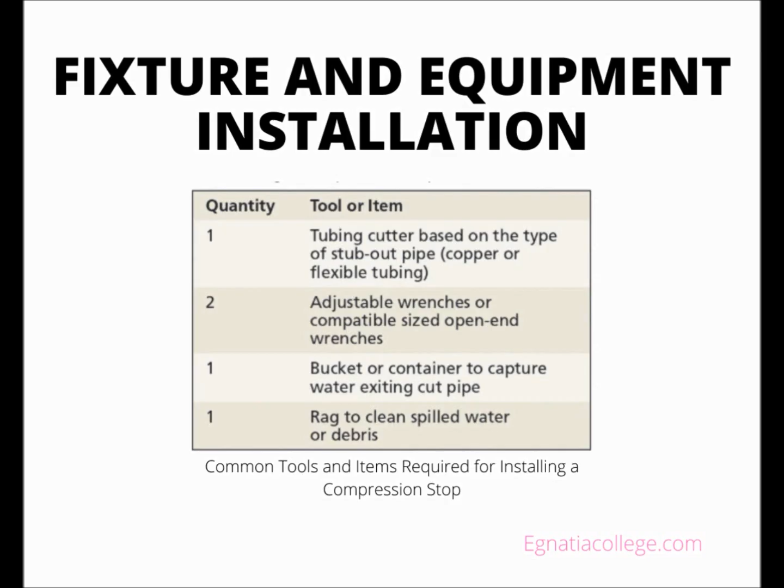All sinks and toilets have an isolation valve called a stop. A wall or floor escutcheon is installed before the stop to conceal the hole opening of the pipe through the wall or floor. An ice maker and washing machine box require only the trim plate to be installed. A plumber installs a dishwasher while installing the kitchen sink.

Escutcheons and stops. Every ceiling, wall, or floor stub-out must have an escutcheon installed to conceal the pipe penetration. The pipe penetration through a fire-rated ceiling, wall, or floor creates a small opening that must be sealed with an approved fire caulk before the escutcheon is installed. Some codes also dictate that a pipe penetrating a non-fire-rated ceiling, floor, or wall must also be sealed to prevent insects from entering a home through the pipe penetration.

Escutcheons are available in plastic or metal forms, and exposed escutcheons are color-coordinated with the faucet or other trim items. A split escutcheon can be installed around a pipe after the stop is installed, but it is not visually attractive. Escutcheons are ordered for the pipe being served in either tubular or iron pipe size. Every fixture except a bathtub and a shower faucet must have an isolation valve or a stop.

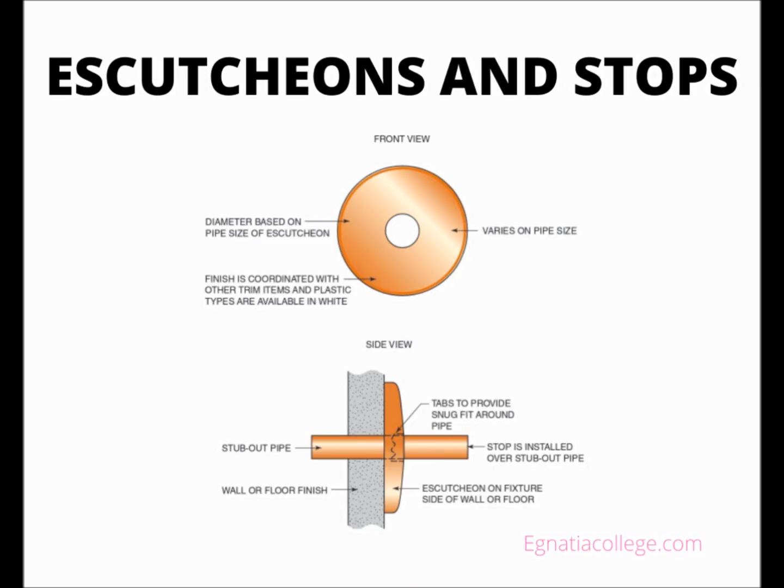The boiler drains that are installed in the washing machine box during the rough-in phase serve to isolate a washing machine. The wall trim plate conceals the wall opening. An ice maker box is similar to a washing machine box, and the isolation valve is also part of the rough-in installation. Sink stops are installed below the fixture and connected to the stub-out pipe. They do not have to be color-coordinated with the faucet finish if they are located in a cabinet.

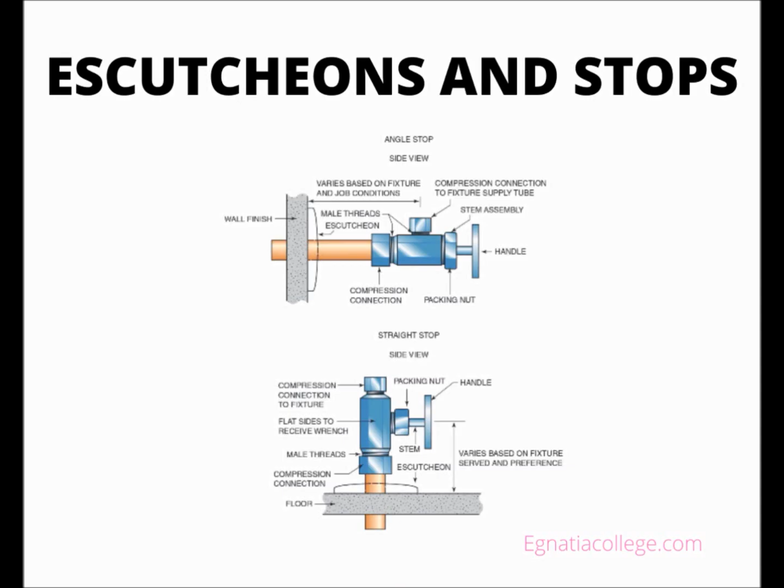A toilet stop is installed onto the stub-out pipe and is coordinated with the trim finish of the faucets in the bathroom. A separate stop might isolate a dishwasher under the kitchen sink, or a dual stop might isolate the dishwasher and hot water supply to the kitchen sink faucet. The type of pipe used as a stub-out determines the connection of a stop to the stub-out pipe. A PEX stub-out pipe requires a stop compatible with that pipe. The connection method is the same as the one used to install the PEX piping during the rough-in.

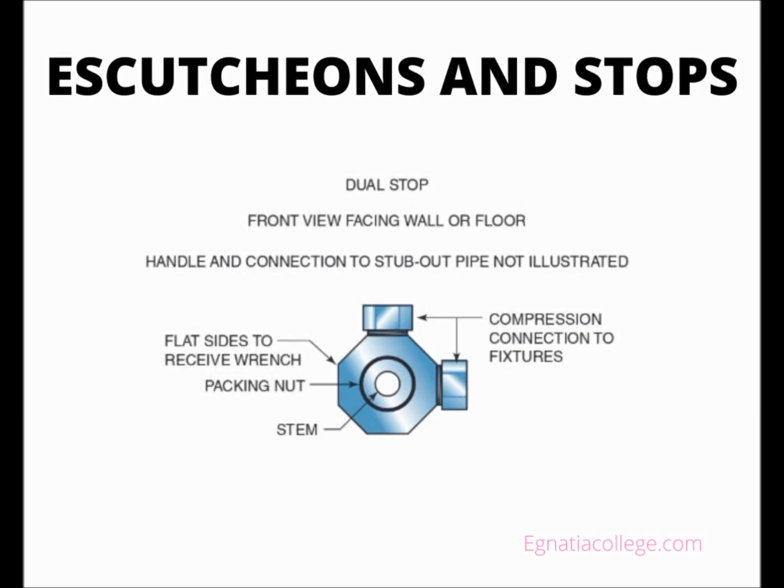A copper stub-out pipe is connected to a stop with either a compression connection or a solder joint. A stub-out pipe that penetrates through the floor typically requires a straight stop. A wall stub-out pipe usually uses an angle stop. The outlet side of a stop is a compression connection regardless of the stub-out pipe installed.

Toilets. The water supply is located on the left side of all toilets, with the stop and escutcheon installed the same as for other fixtures. The stop and escutcheon can be installed before the toilet or, to provide a more exact installation, the toilet can be installed first. Because the water supply connection to the tank for a one-piece toilet is typically closer to the floor, the stop must be positioned more exactly for it than for a two-piece toilet.

A two-piece toilet is sold with a compatible tank and bowl, and a plumber must combine these two items. Some plumbers install the bowl to the drainage system before installing the tank, others assemble the set before installing the toilet. The tank is secured to the bowl with non-corrosive bolts designed specifically for this purpose and provided with the tank.

Most tanks use a 2-bolt pattern, some have 3 bolts. A rubber gasket is provided with each tank bolt to seal the bolt penetration through the bottom of the tank.

Most toilet tank designs require a plumber to install a foam rubber gasket, provided with the tank, that prevents the water that is leaving the tank and entering the bowl from leaking. The gasket, called a close-couple gasket or tank-to-bowl gasket, is installed over the threaded portion of the flush valve on the bottom side of the tank.

Some manufacturers install a rubber gasket that serves as the seal between the tank and the bowl. In this case, the plumber does not have to install a separate close-couple gasket. The plumber should review the manufacturer information provided with each toilet for specific instructions about the fixture being installed.

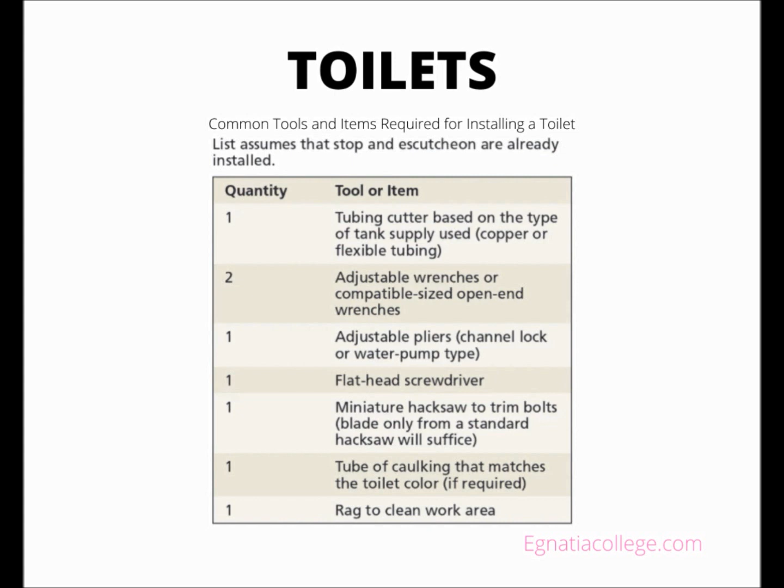The water connection to a toilet requires a supply tube, known as a tank supply, that is designed to mate with the fill valve. A tank supply is an exposed chrome-plated, soft copper tubing with a flat end that connects the stop to the fill valve with a compatible securing nut provided with the tank. Flexible plastic and braided stainless steel versions of a tank supply are available, each with a distinct connecting end that is beveled instead of flat.

The soft copper tank supply is bent by hand or with a bending tool to create the required offset to connect it to the fill valve and stop. The trade name for the fill valve is ball cock. It regulates the water level in the toilet tank.

The toilet is installed onto the closet (toilet) flange and sealed with a manufactured wax ring often called a wax seal. The wax seal is either installed to the underside of the toilet or installed directly on the closet flange. Most manufacturer instructions recommend installing the wax seal onto the toilet, but many plumbers place the wax ring onto the flange and set the toilet over it.

A plastic accessory called a horn is molded into some wax seals, but wax seals without the horn are more common and do not restrict the flow from the toilet. A closet flange allows two different anchoring selections to secure the toilet to the closet flange. One option has a large slot that allows a plumber to adjust the closet bolts slightly in case the flange is not installed to exact dimensions from the back wall.

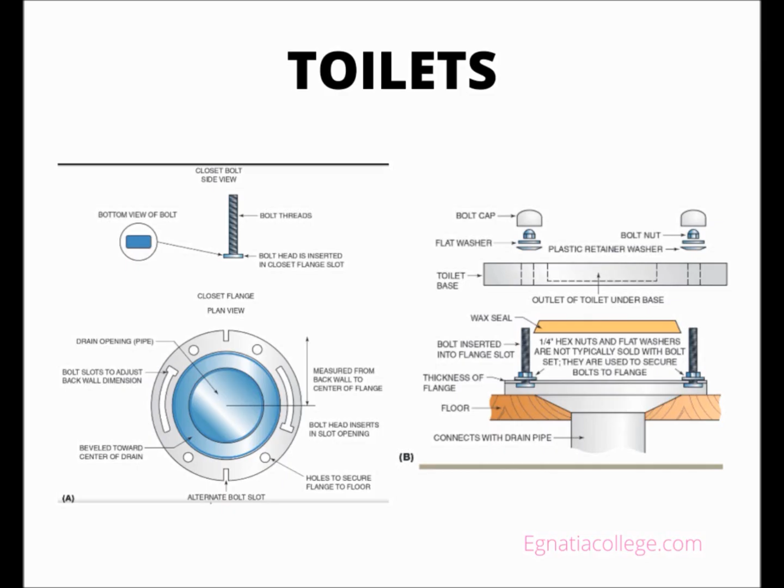In the second option, small slots require the plumber to install the closet flange to an exact dimension from the back wall. Most plumbers use the larger slot option. Once the flange is installed to the drain pipe, the next step is to install the closet bolts. A pair of 1/4-inch closet bolts is sold as a set along with the required flat washers and hex nuts to anchor the toilet to the closet flange.

Plastic decorative bolt caps and retainer washers that conceal the nut and washer of the closet bolt set are sold with the toilet. Each closet bolt is cut with a miniature hacksaw after the nuts are securely fastened to allow the bolt caps to be installed. A toilet seat is purchased by color and bowl design, either round or elongated. Residential toilet seats have a hinged lid and installation is self-explanatory.

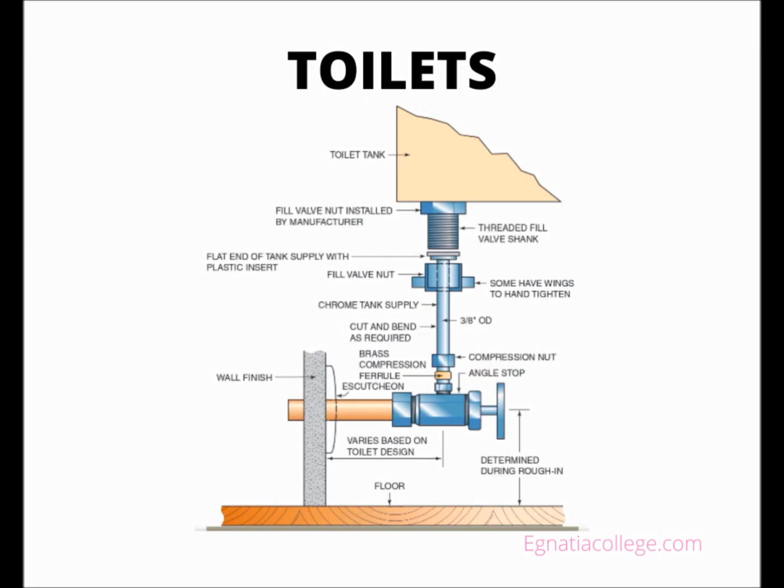Some codes require the base of a toilet to be caulked where it sits on the finished floor. If so, the caulk should be the same color as the toilet. This figure illustrates the connection of the stop and fill valve using a soft copper tank supply tube.

Lavatories. Most residential lavatory sinks are pre-molded with the countertop from cultured marble. A general contractor typically provides and installs the combined countertop and sink, and a plumber installs the faucet and drain to create a functioning plumbing system.

Numerous faucet designs are available, each of which is installed according to manufacturer instructions. A plumber must review the manufacturer information when installing a specific faucet for the first time to ensure that the installation is correct. Some faucets use a specific supply tube known as a lavatory supply. Other faucets use a compression coupling union connection.

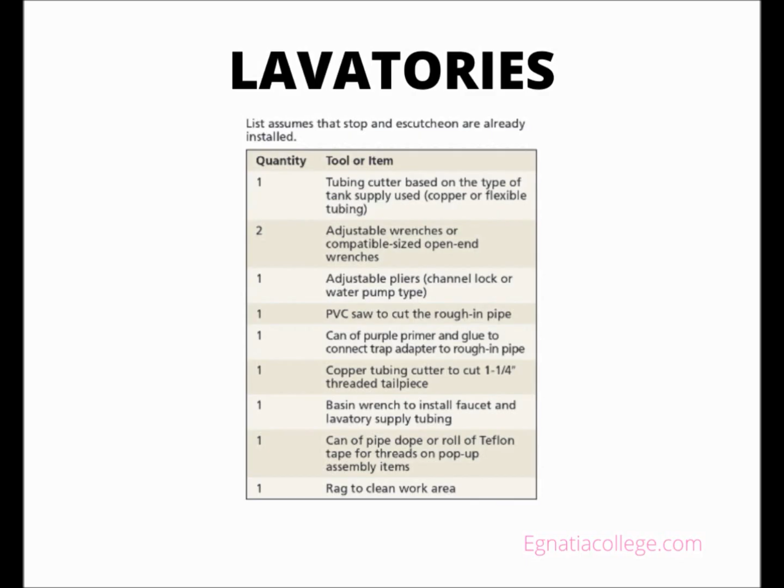Every fixture is protected by a P-trap to prevent sewer gas from entering an occupied space. The size of the stub piping serving a lavatory is either 1 1/4 inches or 1 1/2 inches.

A plumber typically installs a 1 1/4 inches P-trap. Therefore, a 1 1/2 inches by 1 1/4 inches trap adapter is sold with many P-trap assemblies. If a 1 1/2 inches P-trap is installed, it will have a 1 1/2 inches trap adapter. A reducing slip joint washer is required to connect the P-trap to the 1 1/4 inches drain from the sink.

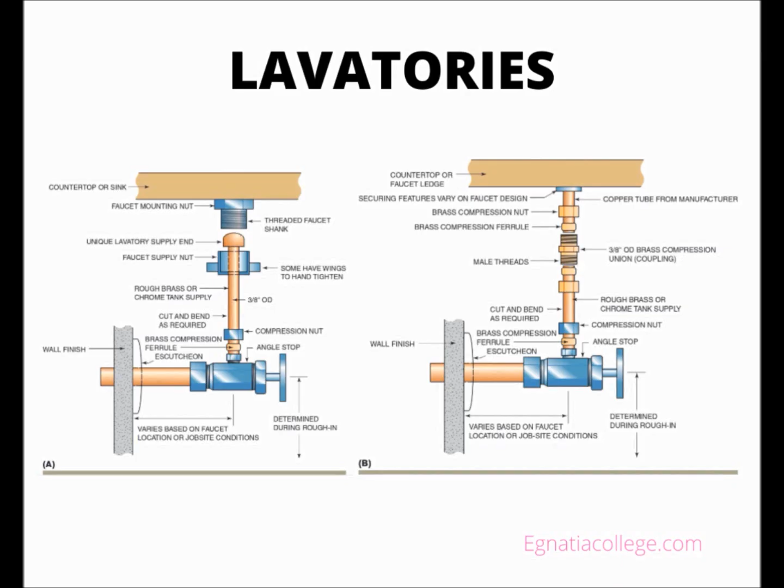Most residential lavatories use a pop-up drain assembly, which is sold with the faucet. The manufacturer installation instructions include specific information about the drain assembly. The overflow drain on a residential lavatory is provided by the sink manufacturer.

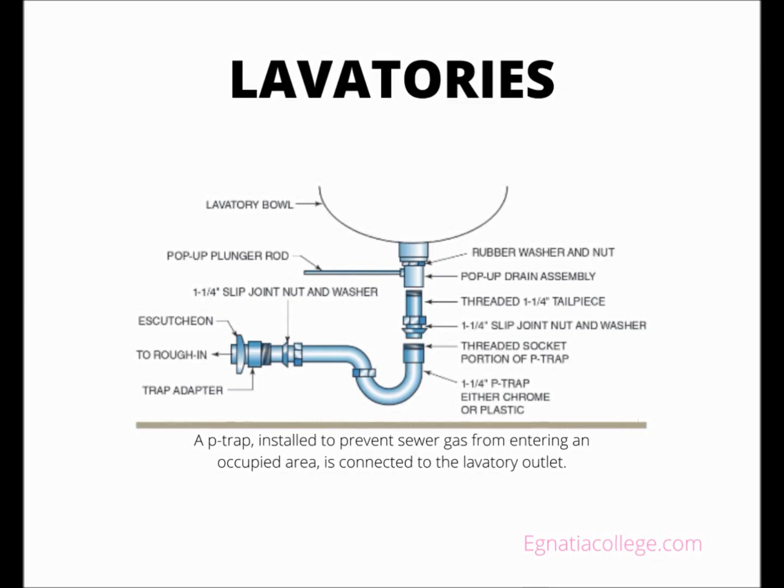If the tailpiece provided with the pop-up assembly is too short to be connected with the trap inlet, a longer threaded 1 1/4 tailpiece or extension tailpiece is installed. If it is made of metal, it is cut to the desired length with a copper tubing cutter. Plastic tailpieces are cut with the appropriate PVC saw.

Kitchen sinks. The tools required to install a kitchen sink are the same as for a lavatory sink, with the possible addition of a larger pair of pliers and a Phillips screwdriver. Numerous styles of kitchen sinks are available, and many have unique installation methods. Most kitchen sinks are installed into a cut opening of a countertop and on the countertop. Some plumbers cut the hole into the countertop. Usually the general contractor provides the opening based on the dimensions provided by a plumber.

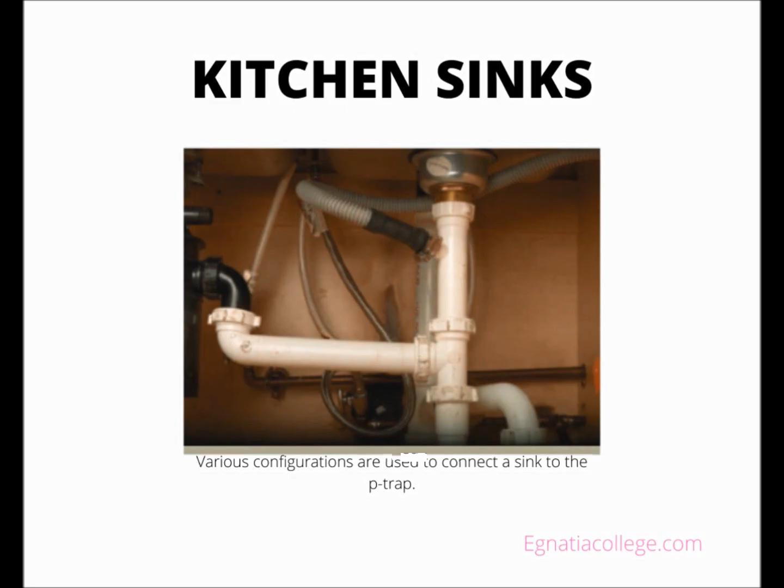Kitchen sinks in residential construction are often made of stainless steel or cast iron. The weight of a cast iron sink provides the stability needed to maintain its permanent position on the countertop. A plumber typically applies caulking to the edge of the cutout area of the countertop as the cast iron sink goes into the hole. The excess caulking is cleaned with a wet rag.

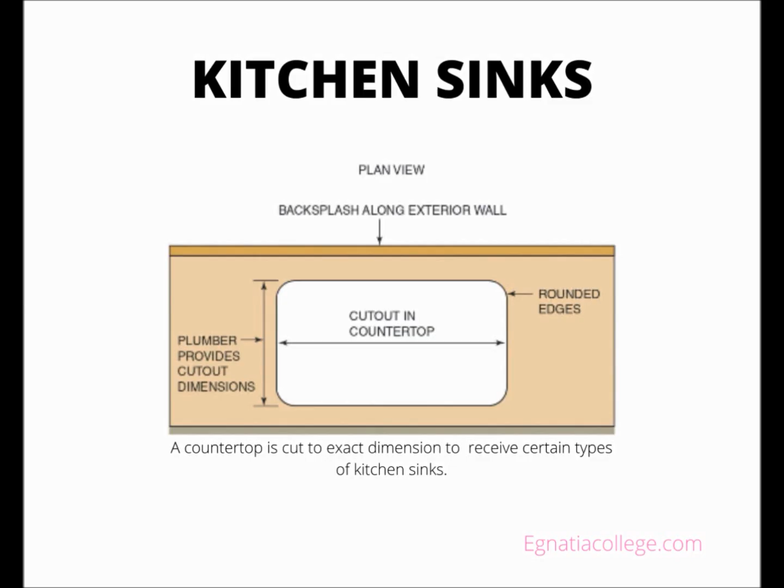A stainless steel sink must be fastened with clips provided with the sink. Putty or caulk is applied under the rim of the sink or around the cutout area of the sink. The sink is then inserted into the cutout and attached from under the countertop with the fastening clips. The faucet is typically installed onto the sink before the sink is installed onto the countertop to increase productivity.

Basket strainers can be installed in the drain openings of a stainless steel sink before the sink is installed. Basket strainers are installed after a cast iron sink is installed because drain openings are required to safely install a heavy sink. The drain connection arrangement below the sink varies based on the location of the stubout, the number of bowls, whether a garbage disposer or a dishwasher is installed, and company preference.

Code allows a single P-trap to connect a double bowl sink, and a plumber typically uses an arrangement known as a continuous waste, which is purchased as a kit. If a garbage disposer is installed in one side of a double bowl sink, a plumber typically installs a separate P-trap for each drain opening.

If a dishwasher is installed, the discharge hose is connected to a designated connection on the side of a garbage disposer. If there is no garbage disposer, the dishwasher is connected to a tailpiece designed for connecting the dishwasher hose to the sink drain. The electrical connection to a garbage disposer is installed by an electrician, not by a plumber. If an air admittance valve, AAV, is the vent for the sink, it is installed during this phase of construction.

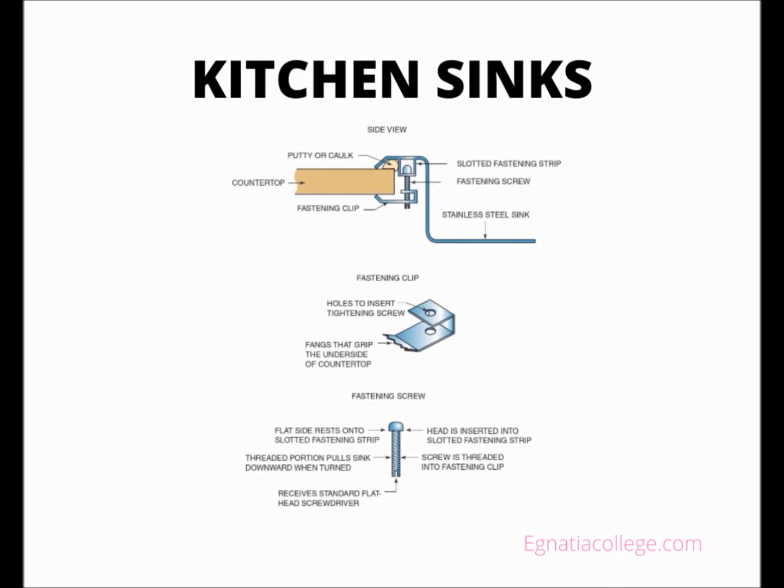The type of water supply to the faucet varies depending on the type of faucet installed. Some connections have a lavatory supply, others require a compression coupling union.

Dishwashers. A plumber provides the water and drain connections to a dishwasher. A general contractor or building owner typically provides the dishwasher. The hot water supply is routed from under the kitchen sink, and the drain hose from the dishwasher is connected to either a dedicated connection of a garbage disposer or a tailpiece designed for that purpose.

A manufacturer provides installation information, and a plumber must review that data before installing a specific unit. Most dishwashers have a rubber connector on the end of the hose that is connected to the disposer or tailpiece. A plumber secures that connection with hose clamps. Two short wood screws are provided with the dishwasher to anchor it to the underside of the countertop. Damage to the countertop can result if longer screws are used.

The dishwasher must be installed so that the sides are flush with the face of the cabinets and the top of the door is level with the countertop. A dishwasher has leveling legs that are adjusted to accomplish this installation.

A hole is drilled in the side of the sink base cabinet as high as possible to route the drain hose to the sink area. The drain hose is connected at the factory to a pump located under the dishwasher. Some codes require an air gap device to be installed in a hole dedicated for that purpose on a kitchen sink. If so, the drain hose is routed through that device and then to the sink.

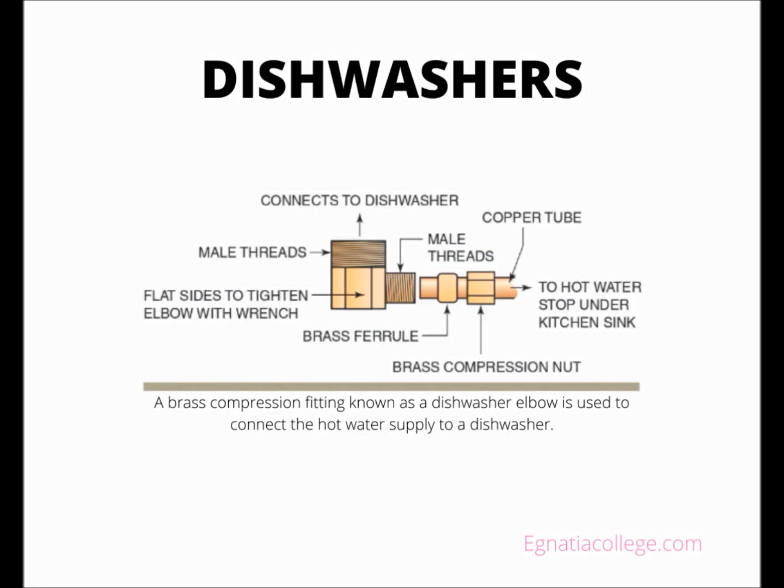Laundry sinks. The tools required for installing a laundry sink are the same as for a lavatory, with the possible addition of a Phillips screwdriver and a level. The two most common types of laundry sinks are wall-mounted or have four legs that are secured to the floor. A drill might be needed to install anchors into the floor. If the sink is installed on a concrete floor, a hammer drill may be required to drill holes into the floor to install anchors. The water supply connections are similar to a lavatory installation.

Knockout spots are present on laundry sinks where the faucets are installed that must be removed by a plumber. The faucet ledge can be drilled to install a faucet that is different from those that are typically designed for a laundry sink or to install accessories such as a soap dispenser. The drain connection is the same as for any sink, and it has a P-trap as well. The trap size is 1.5 inches, and it has a flanged tailpiece to connect the sink strainer to the P-trap.

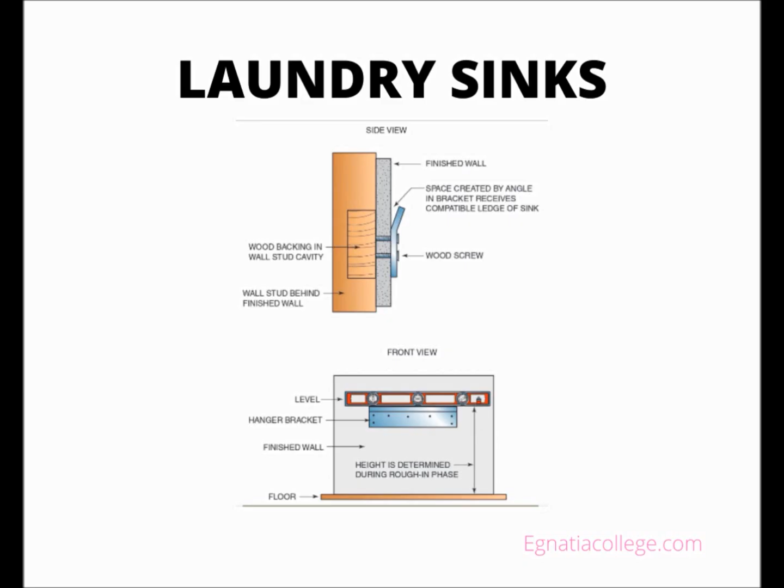A wall-mounted version requires a plumber to install wood backing in the wall during the rough-in phase. A hanger bracket that is installed during the trim-out phase is provided with the sink. The hanger bracket is installed with wood screws at a height determined during the rough-in phase. The sink is typically not more than 36 inches from the rim to the floor. The sink is suspended from the hanger bracket, and two side panels are installed. These panels provide additional stability when the sink is filled and conceal the piping behind the sink.

Water heaters. Local codes and manufacturer instructions must be followed when installing a water heater. Many codes dictate, and all manufacturers recommend, using an expansion tank on the incoming water supply. An isolation valve must be installed on the cold water piping near the inlet of the water heater, so the expansion tank is on the downstream side of the isolation valve. If local codes require a check valve, it should be installed between the isolation valve and the expansion tank.

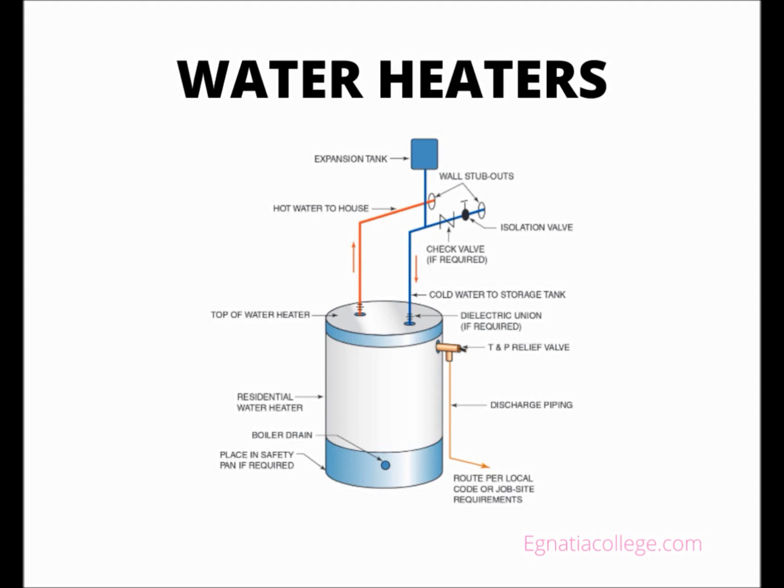A typical residential water heater has 3/4 inch male or female threaded water supply connections. Most codes dictate that copper or other metal piping be installed to connect the rough-in piping to the water heater. Some codes allow using copper flexible connectors designed for that purpose. Dielectric unions are often used, and may be dictated by codes to prevent electrolysis when copper is connected to the steel connection points of a water heater.

The physical location of the water heater often determines the extent of the actual installation. Most codes dictate that any water heater located above a finished area must be installed in a safety pan. The pan drain piping would typically be installed during the rough-in phase. The discharge piping from the relief valve is installed by a plumber, with the termination point depending on local codes and the location of the water heater. Most relief valve outlet connections on a residential water heater are 3/4 inch female threaded connections and require a plumber to install a 3/4 inch male adapter.

Most codes dictate that the relief valve discharge piping must be made of copper or some other metal, so the extreme hot water discharge does not damage it. If your local codes have unique installation requirements, such as earthquake protection, you would need to adhere to those installation requirements as well.

The tools required to install a water heater depend on the piping methods used. All pipe connections can be tightened with a pair of pliers, an adjustable wrench, or a small pipe wrench. If you use copper tube, you will need all the tools required to solder copper fittings. Flux, solder, and sand cloth are required for copper connections, and if PEX or CPVC is connected to the copper, you will need the tools required to install those systems.

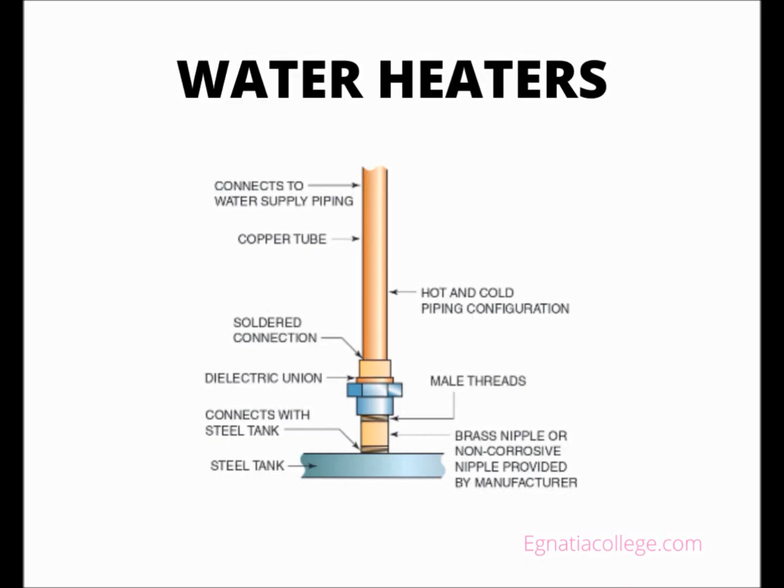Electric water heaters. On an electric water heater, a plumber connects the hot and cold water piping from the rough-in stubouts to the designated inlet and outlet connection on the top of the heater. The type of piping used dictates the actual installation steps. Converting dissimilar materials such as PEX to copper must be performed using approved methods. An electric water heater can be installed with minimal clearance to combustible material. A manufacturer indicates any dangerous conditions pertaining to the specific heater.

Electric water heaters are not as heavy as gas water heaters, but they are fragile and 2 people should install them in place. A hand truck or other equipment moving aids should be used to protect the water heater from damage and to avoid injury to the lifters. Most codes allow the safety pan for an electric water heater to be plastic due to the lack of heat generated externally from the water heater.

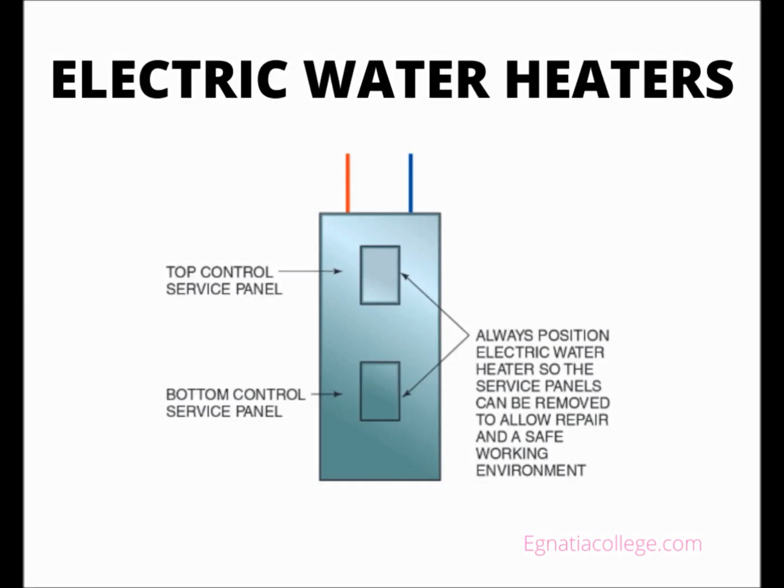An electrician connects the electrical wiring to the water heater, but the manufacturer installs all internal operating devices and wiring. After the water supply connections are complete, the tank is filled with water and all air is removed by opening a hot water faucet. The electrical current is then energized to make sure that hot water is being produced.

Gas water heaters. The tools required for a gas water heater installation are the same as for an electric water heater, with the exception of needing 2 pipe wrenches to connect the gas piping system. Some codes require a special gas license to connect the gas supply to the heater. The water supply connection methods and code information may be the same for a gas water heater and an electric water heater. Codes vary pertaining to the gas supply connections and venting regulations. The specific water heater dictates many of the installation methods.

One code for gas different from that for electric water heaters is that the safety pan must be made of metal rather than of plastic. A manufacturer's label on the water heater indicates what the clearance must be from combustible materials, which varies. The gas supply pipe arrangement is fairly typical for most residential water heaters. The gas regulator, gas valve, has a 1/2 inch female threaded connection.

The manufacturer installs all operating devices and piping in the burner assembly area, and a plumber simply provides a single gas connection. Most codes dictate that a drip leg must be installed to collect any small particles or moisture present in the gas supply system. A drip leg is assembled using Schedule 40 black steel pipe nipples and black malleable pipe fittings. Flexible metallic connectors designed for this purpose may be allowed by local codes. A gas cock or another approved isolation valve is installed near the water heater.

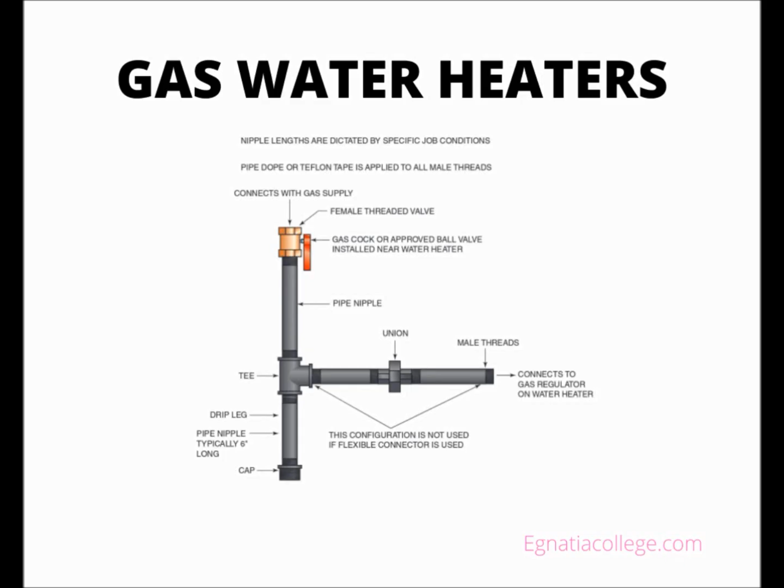When the tank is filled with water and all air is removed from the tank and system, the gas supply is activated and tested for leaks. A specially formulated soapy solution is applied to the gas pipe connections to inspect for visible signs of a leak. Once the gas system is tested and inspected, the water heater can be operated and tested.